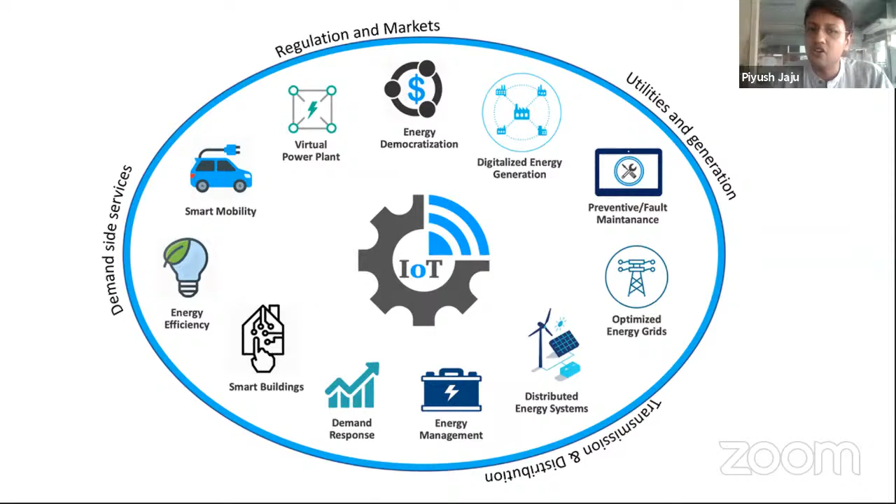Going forward, the very critical part would be how we are able to integrate artificial intelligence and machine learning also. That is going to be the real game changer going forward.

When we are able to have better algorithms for how we analyze all the data that is getting captured, and through that do better forecasting of all the data, in order to really reduce the risks that come about with renewable energy, because that is something we have to take as given.

The sun is not going to shine brightly every day. The stream of water will not be consistent every time, and so will be the wind. There will be large variations, especially when we are talking about climate change, which is going to absolutely create havoc.

We are fairly certain that climate change is going to play a huge role, which will alter wind patterns, conditions of the sun, of the rivers, of everything. If that is going to have such an adverse impact on renewable energy generation, then what can we do by developing better algorithms and better models wherein we can create automatic learning for better prediction based on our historical weather data?

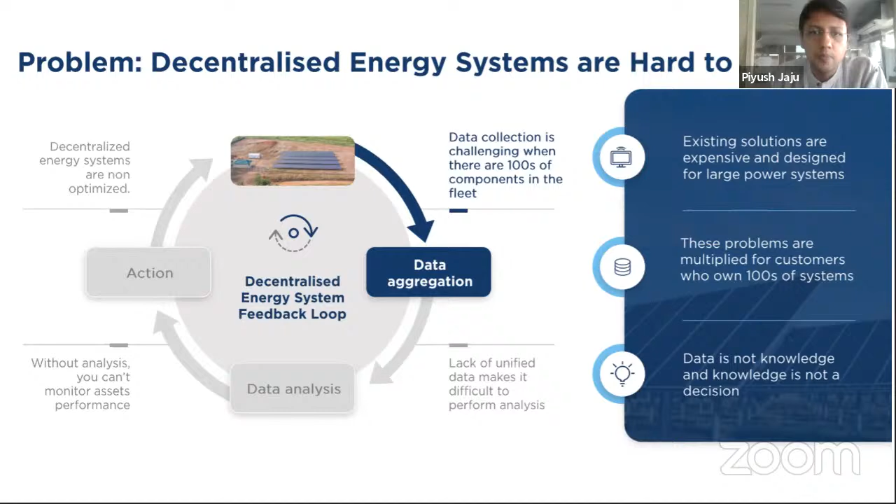We are able to really shorten the response time. We are able to clearly understand where the problem may lie. More importantly, we are able to build trust with the end user that these systems actually work. There may be some internal problems, or some external reasons why there has been failure of the system, but one can definitely address it when we are able to remotely monitor those sites and remotely diagnose what the problems are. So that's how, through IoT devices like remote monitoring and control, we are able to understand and really make a big difference.

So this is where I would like to discuss the remote monitoring and diagnostic part that we are now integrating with all our systems. That happens, be it with lighting or water pumping or various other things.

So here, especially what we've done, we've collaborated with a German-based company called Ferntech, wherein we are using what they call a universal monitoring controller. What does the universal monitoring controller do? It's a remote monitoring device which can be added on with any other controller. You have controllers for pumps, controllers for microgrid systems, or inverters. So through developing the APIs, you're able to connect with the controller of the system, and then monitor all the aspects of generation and usage.

And ultimately, all that gets stored in a cloud through which, in one central dashboard, we're able to monitor all the sites. So such kind of a remote monitoring and diagnostic device is the example I was given with. Here what we do is we just use any particular GSM based SIM which has data connection, which gets added on with this universal monitoring controller. Ultimately, with very little human intervention, we are able to monitor all the sites in a proper way.

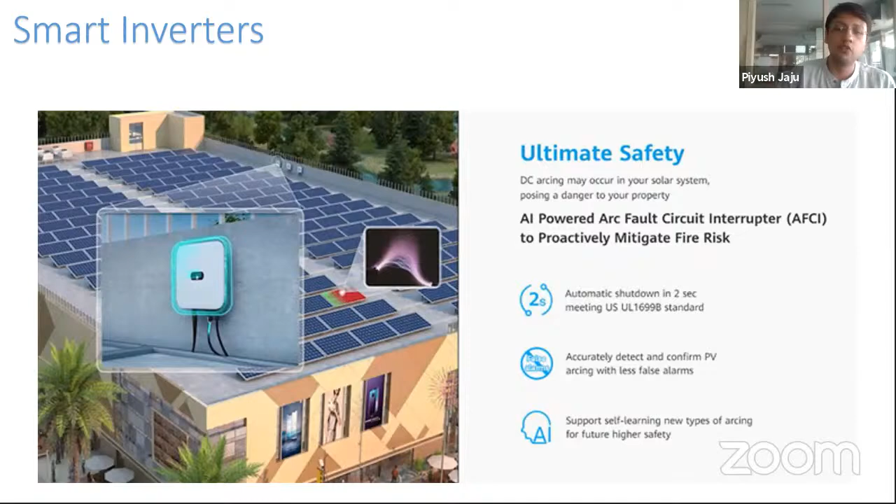Secondly, it's about again utilizing these remote monitoring systems in order to adequately understand, operate the system, and then adding an AI level going forward. By AI level, we are able to properly capture the irradiation level, the weather impact. We are able to model out if there is any shading happening, or any other obstacles which are there, at what time cleaning will be required if there is more dust accumulation. So automatically it throws out more alerts based on the reduction normally in the energy which is generated from the modules, which is most likely caused by the need for cleaning, which can then increase back the generation. So all those things we're able to utilize through better predictive models, through better algorithms.

If in future we have to definitely look to design these things more efficiently, it'll be very important to understand how automated cleaning can happen based on dust accumulation, and that kind of modeling is done so that generation can be increased manifold.

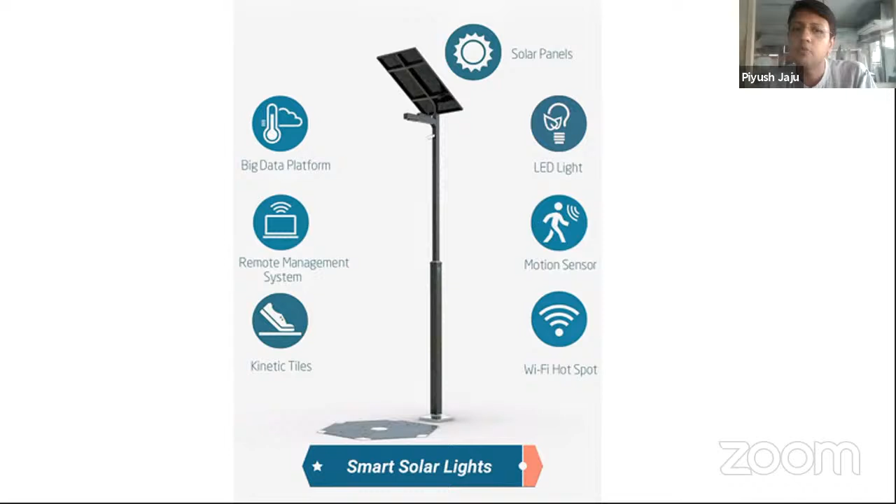One can even integrate cameras into the street light system. So you're able to, by sitting in my laptop, have a camera installed along with this solar street light, and I can understand what is going on over there. So those are incorporation of better smart ways in which we can really make these street lights much more effective.

Now, going to the point of village electrification through the solar microgrids which are there. Of course, when we initially used to install these microgrids, it was just something very simple. You have centralized either DC microgrids or AC microgrids, in which you are just powering the entire village which is there.

And we've seen there were so many challenges that used to happen because jugaad works so well even in villages. Somebody will figure out a way in which how you can tamper with the system, or you can connect different loads to it without any information, or there may be some other ways in which directly somebody is plugging the battery and powering some devices bypassing the controller. So there were so many different things that were happening.

But really, when you're able to make these microgrids smart, it can have such a big impact by using prepaid metering, prepaid meters, smart meters. So one would be able to understand that if there is any theft at a household level, the lights automatically go off, because with these prepaid meters installed, you will have to pay and punch a code in order to reactivate the system if you've not charged and paid for the household connection.

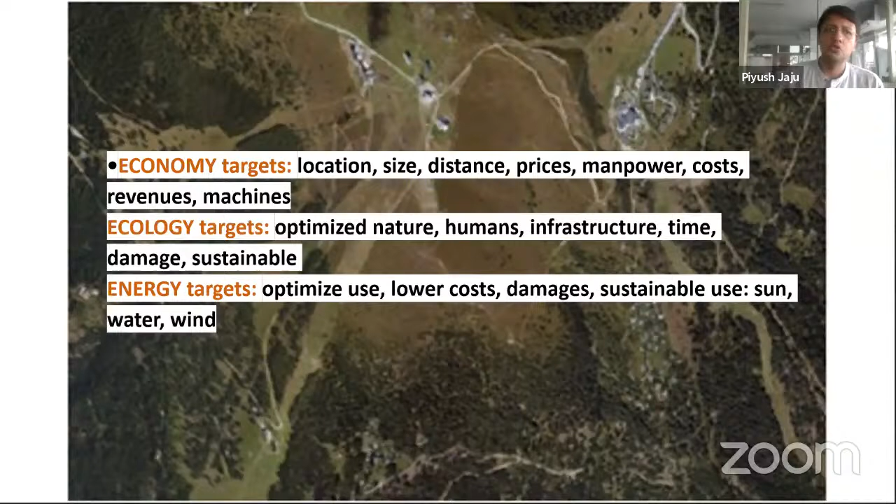And identify which are the key belts, maybe first, which are the key horticulture belts where there is deep penetration, which we should be addressing through these different agricultural smart solutions. That's one way in which we've been using the GIS maps. There's a company called PROGIS, based out of Austria, who's developed some wonderful GIS mapping tools through ICT, which is really able to assist with precision farming.

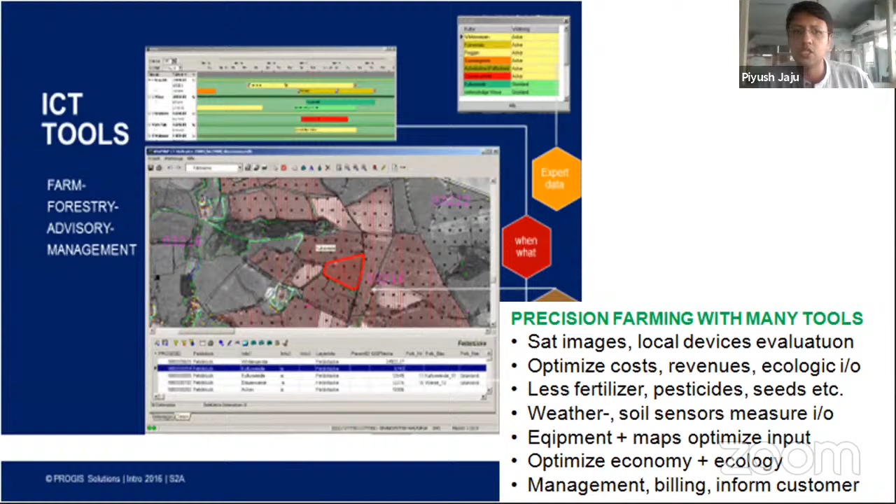So there, particularly, one of the key interventions is we are able to identify through satellite images, study the entire farm which is over there, how we are able to optimize at a macro level the areas which are being covered with different interventions, and then come up with the right kind of solutions based on the data that is getting captured through the software tool which is incorporating GIS mapping. These are some examples of what kind of images are getting captured, and specifically how you're able to address those particular issues.

Now, from a macro level, let's go down to a micro level. Let's look at how we can use drones to really understand and analyze at a farm level how it's happening. So the solution is simple: you're mounting a multispectral camera on a drone, and the drone is being used in order to do the entire assessment of the farm. So through the spectral images which are captured, one is able to monitor and understand.

From the soil, for the plants, the status of the plants, and even the solar cells, one can understand through the spectral images. There have been very significant ways, and it's really amazing, that just through these different images, the amount of information one is able to gather and understand - the level of soil nutrients, the moisture level in the soil, how healthy the plants being grown are, and is there any problems with the solar cells which are there.

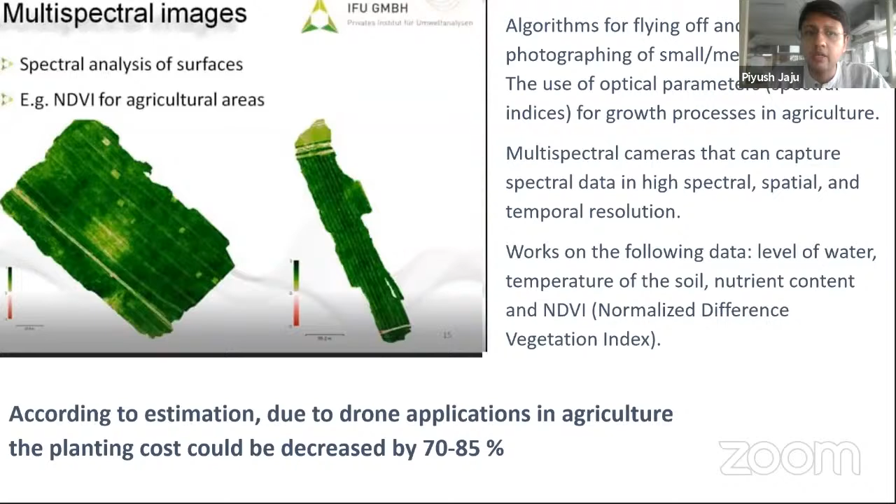It's practically so difficult to go around the entire acres and acres of area which are there, but especially drones can assist with getting the right kind of information. And ultimately this is where it really helps to better automate farm level mechanics and also do better precision farming, once we are able to analyze.

So a software has been built which can understand and read all these spectral images which are getting captured, and based on that we are being able to provide the right kind of inferences and the different interventions required, and ultimately that's what will lead to greater agricultural productivity. It's very surprising, the productivity which is there, and the different ways in which we are able to really enhance it through these smart technologies.

So these are some of the cameras which are installed on top of the drone, through which we are able to capture these high resolution and spectral images, which are then ultimately analyzed to improve better farm management and enhance productivity, and to pinpoint the right kind of interventions required for better crop management - be it pest management, or any loss of nutrients in the soil, or any problems which may have a big adverse impact on ultimate productivity. Those are things that can ultimately be addressed through these interventions.

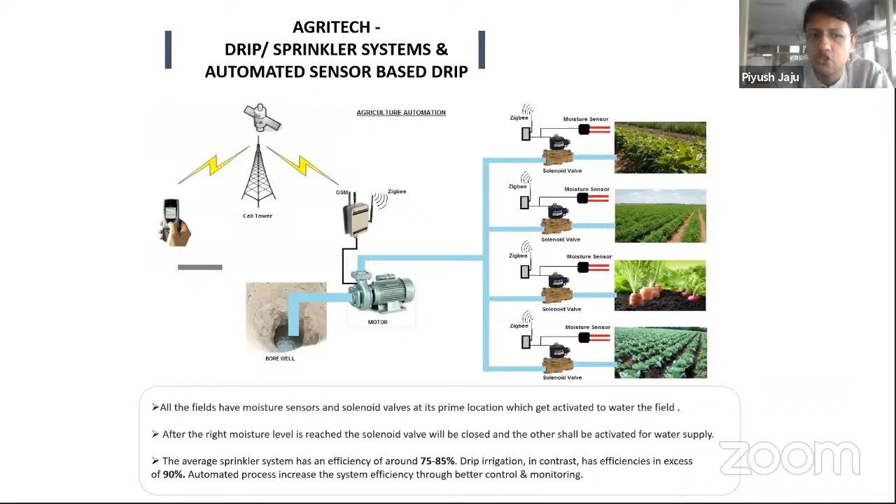As we know, drip and sprinkler based systems are able to reduce water requirement by 50 to 80%. As compared to a regular drip system, the automated sensor-based drip system can bring about a further 25 to 30% efficiency. So overall, compared to regular flood irrigation, we are able to achieve more than 90% efficiency in water usage when we combine it with moisture level sensors and automate it without any human intervention on when to switch the drip on or off. We are not doing any kind of over irrigation, and everything can run much more seamlessly. This can really have an impact to transform the entire irrigation space, which we are very keen to develop.

Overall, the understanding is that through the app we are able to better monitor the irrigation level and how much fertilizer is being used. So better water management and better fertilizer management is what we are able to achieve through this app. We integrate this app with the regular solar water pumping system, or even the automated sensor-based drip system. Ultimately, the app provides important feedback and data, with the help of various sensors deployed, to optimize both the fertilizer requirement and the water requirement, which would significantly enhance the productivity of agriculture, but also save on the input costs required.

These are solutions that are not just simple R&D for the sake of being smart - ultimately all these solutions need better unit economics and cost economics if we are to scale. Unless there is a clear financial benefit, there's no point developing these technologies. That's why even with a small investment in the app and these automations, what really helps is the amount of savings in input costs - if one is able to save 50% more on fertilizer costs, on diesel costs, on electricity costs by going solar, and by reducing and optimizing the design.

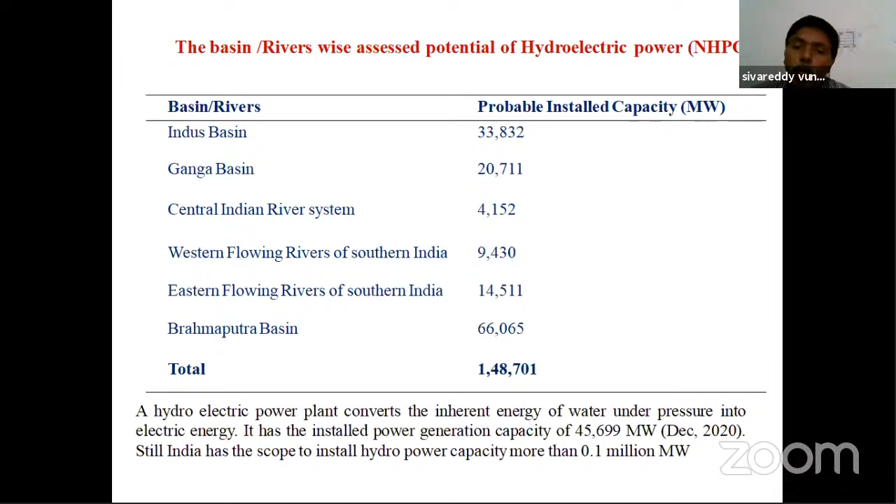So hydro construction is not that easy. If anything goes wrong, villages will escape from our map, the Indian map. That much of danger is there. Even though we are facing that much danger, the maximum capacity we can achieve is only 1 lakh megawatt.

Next, coming to wind energy. Okay, we will move to wind energy. What is the maximum capacity? It is 48,561. We already installed more than 30,000. There is not much scope left.

One more source is bioenergy. That is also not sufficient. At present, India has 1,000 megawatt. So our needs are in lakhs, but the available sources are only in thousands.

That's why, even though solar radiation has more intermittent nature - no guarantee how much energy is coming, it changes hourly - we are still dependent on solar, because the only energy available in the world sufficient for fulfilling our needs is solar energy. That's why we concentrate on solar energy.

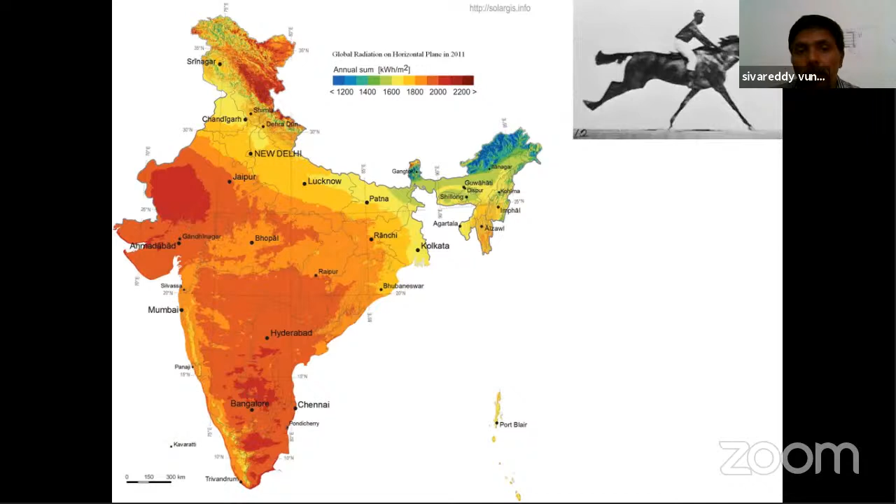This is the sun's nuclear reaction. The sun's temperature is around 5,771 Kelvin. That much of radiation and temperature energy, once it reaches Earth, temperatures reach up to a maximum of 50-55, and radiation of 1353 watt per meter square of solar radiation is coming.

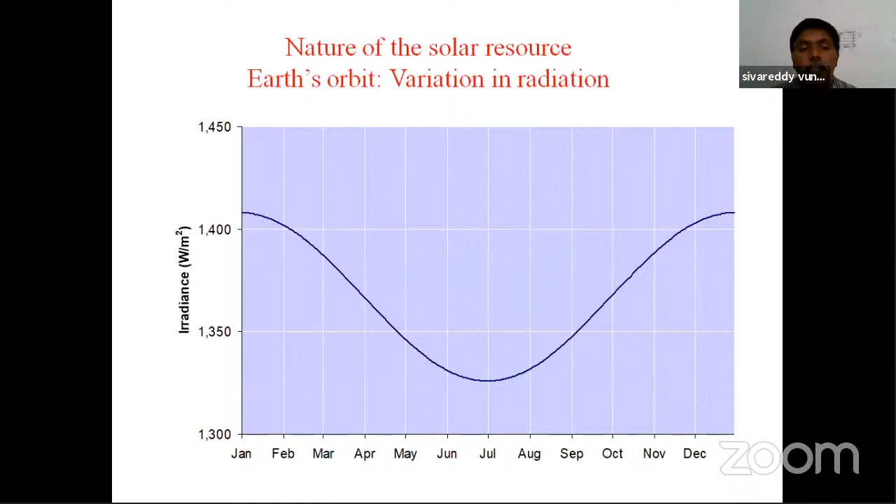Maximum watt per meter square of solar radiation can reach the Earth. This is the Earth's orbit radiation variation, and based on Earth's self-rotation and axis rotation, and because of the sun's rotation, so many angles come into the picture: latitude angle, longitude angle, hour angle, zenith angle.

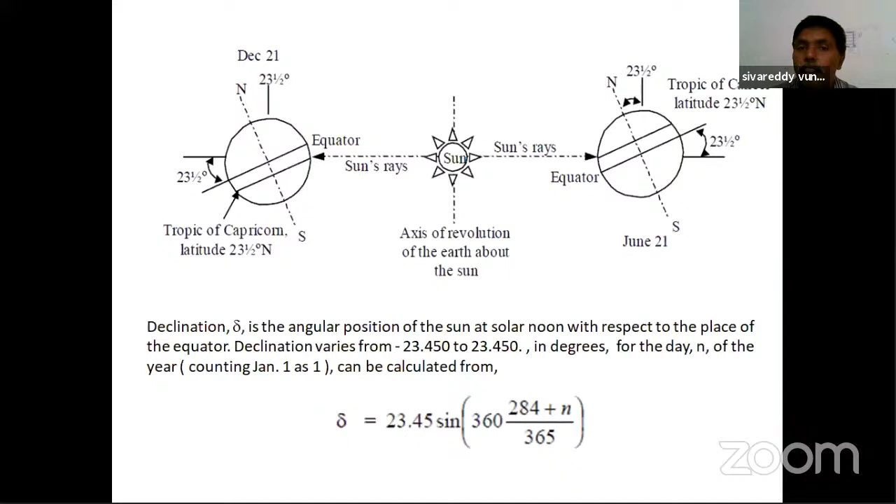So based on the declination angle, different angles are there. Because of the angle of inclination, some of the energy is lost. I think from the 1980s to 2010, more than 50 theses were produced based on just measurement of solar radiation - nothing else. Measurement or estimation of solar radiation with respect to latitude and longitude. That estimated solar radiation may be beam radiation, not global radiation, or sometimes it is global radiation, sometimes it is beam radiation.

More than 50 theses I know. IIT Roorkee or IIT Delhi or IIT Bombay majorly produced thesis just on measurement of solar radiation or prediction of solar radiation.

One of the models I am showing, because in our IIT Delhi, my senior did this validation. Finally, the measured value and predicted value almost came to a nearer value, not exact. So this model is somewhat useful for a particular location only, Jaipur station, not all stations. This model is not valid for all stations.

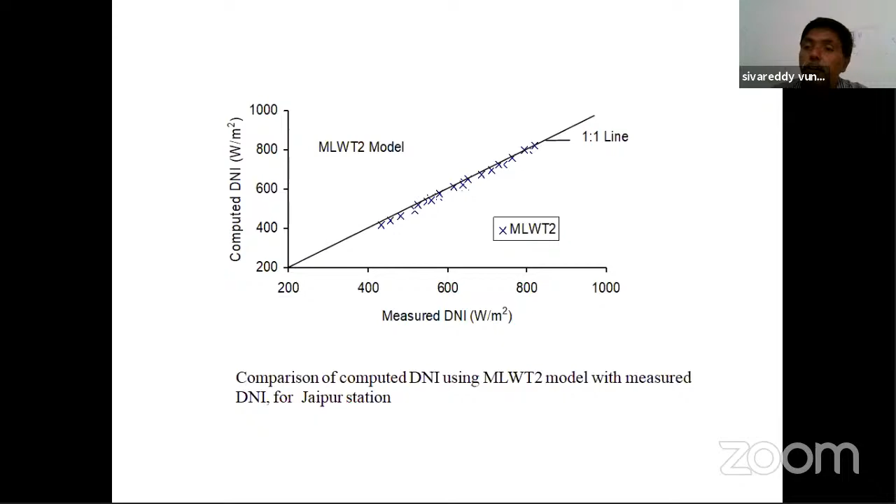Then for prediction itself, we are doing this much research, meaning when we will develop the technology, that is the question mark. So developing technology, we are stopping at measurement of solar radiation. That's why establishment of a lab is very much important.

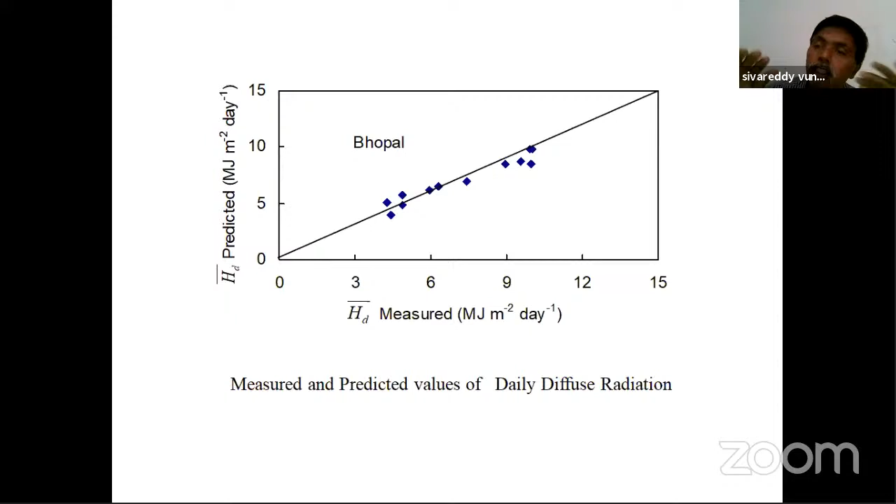If your proper solar radiation measurement lab is available with you, then you can do some harvesting technologies, solar radiation harvesting technologies, and we can do evaluation, performance evaluation, and cost economics and feasibility study of the systems. If you don't have any proper scientific measurement system with us, then we are stopping up to just measurement of solar radiation only.

Just for the importance, I am showing different measurement instruments that are there. A pyranometer is there. This is the pyrheliometer for measurement of beam radiation, but this sensor always has to be opposite to the sun. Only then will it generate the EMF. Otherwise, it will not generate the EMF.

The pyranometer has two bulbs, or evacuated bulbs, in it. Basic principle is just thermocouple junctions, two dissimilar metal junctions exposed to different temperatures. Automatically, it will generate the EMF.

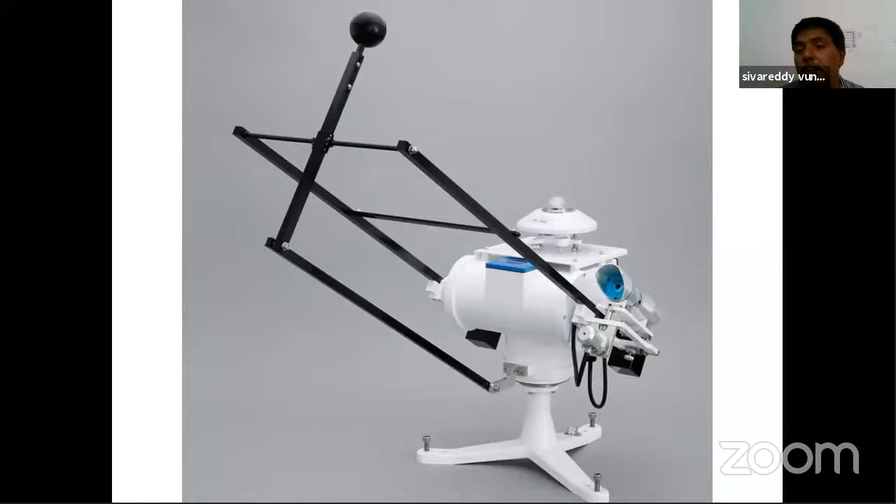This is the tracking unit. Because I want to maintain it opposite to the sun, and every time one person cannot sit and search where the sun is, a tracking system is required. This is the facility available in the institute, and logging facility. I will show that one.

Next, temperature measurement, we are using different measurement units.

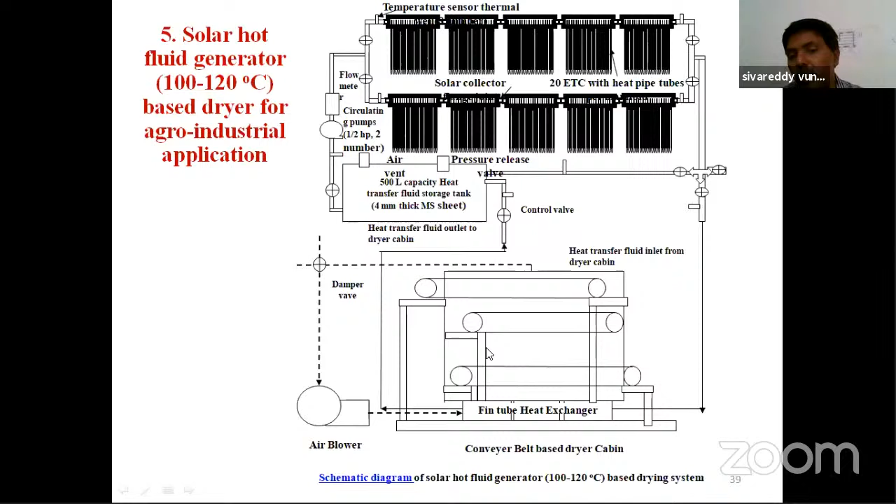Second, solar dryer facility, I already mentioned, industrial solar dryer with us. ETC with heat pipe collectors, collecting the solar radiation and storing that energy in a storage tank. From that, we are supplying the hot fluid and air, circulating inside the dryer cabin. Here we are heating, and removal of the moisture is taking place in a conveyor belt drying system.

These are the units: solar collector and thermal energy storage unit, and dryer and damper unit, and a full-fledged conveyor belt drying unit. Now, with this small introduction, I think you understand the purpose: measurement of solar radiation, and one established industrial dryer is available in our lab.

Any participants from the Rayalaseema or Andhra region can visit anytime. There is no issue, easily you can access it, and also it is away from the class work. So anytime it is welcome for all participants.

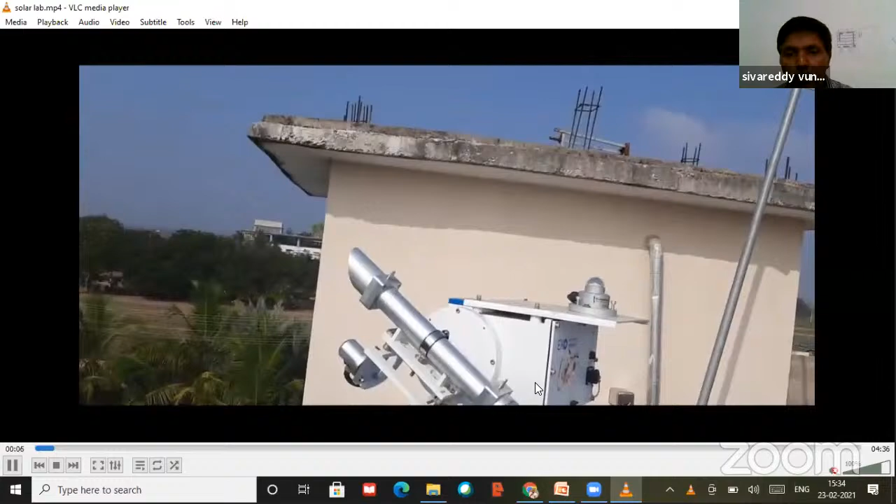Next, I will show the instruments. This is the instrument. Now it is not opposite to the sun. Why? Because I have not given power supply to the tracker. This is the pyrheliometer for measurement of beam radiation.

Pyranometer horizontal, upon the horizontal plane, measures how much solar radiation is coming. It is opposite to the sun, measuring how much global radiation we are getting: global radiation and beam radiation. Then we can calculate the diffuse radiation.

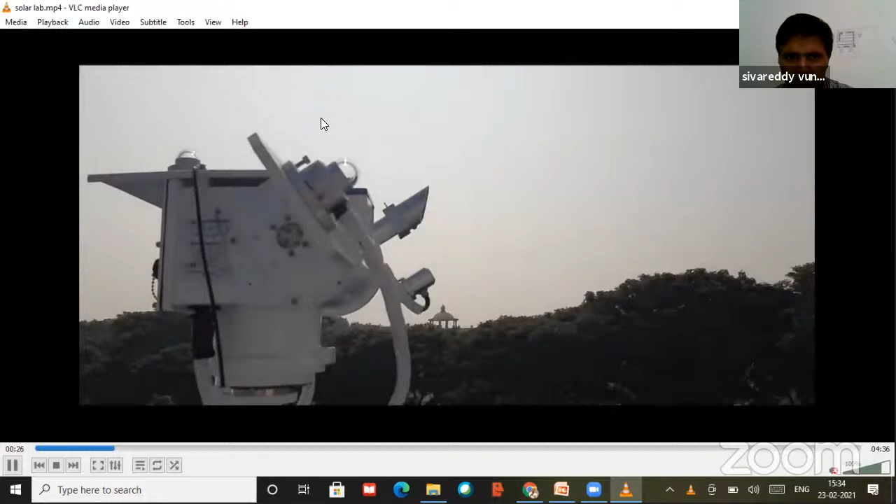Sun is on that side, our system is on this side. Why? Because I am not giving power to the tracker. Once I start supplying electrical energy to the tracker, then automatically it will track the sun first.

You can see this is our institute building, so it is somewhat away from the main buildings, because for R&D we established a separate solar R&D center.

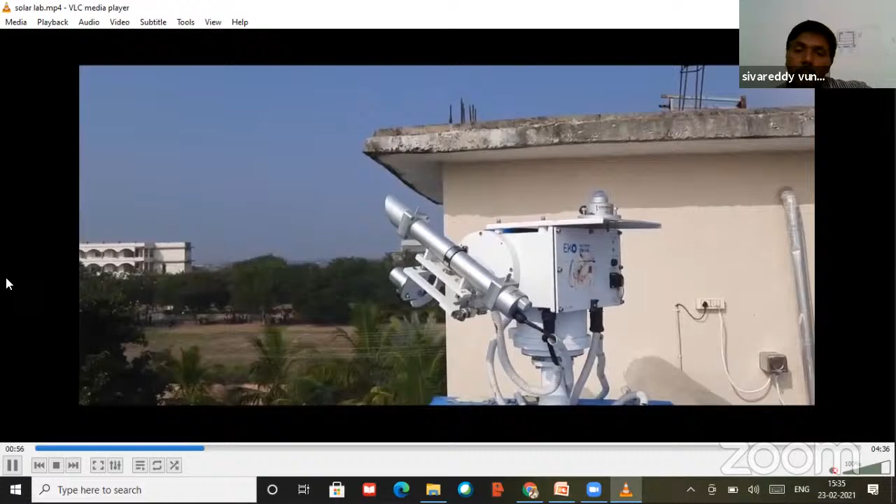See, now also we are not given the power supply. Yes, now we have given power supply. Then it is first tracking the sun, searching for where the sun is.

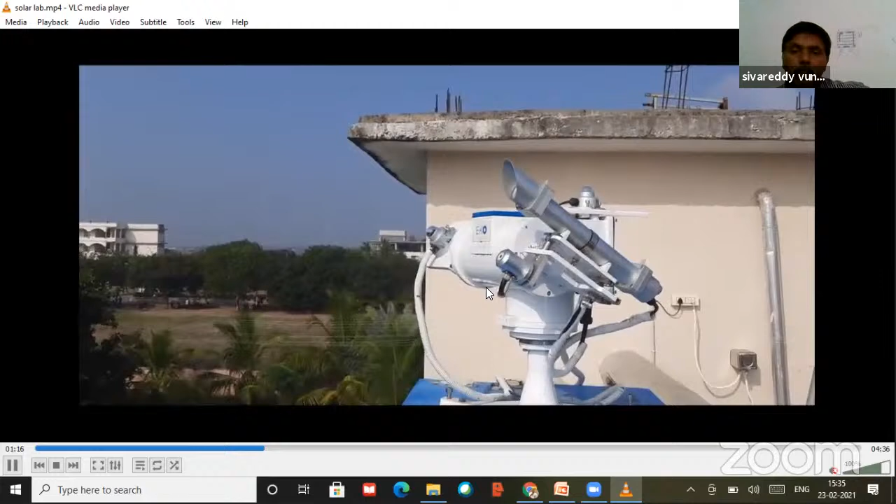This is the sensing unit. The sensors give equal amounts of EMF, then only it will stop. The tracker will stop. Yes, dual axis tracking, multi-axis tracking, not just dual axis. It is searching for the sun, where it is available.

Yes, let's see. Actually, we purchased a dual arm system tracker. It measures global radiation opposite the sun, and measurement of beam radiation.

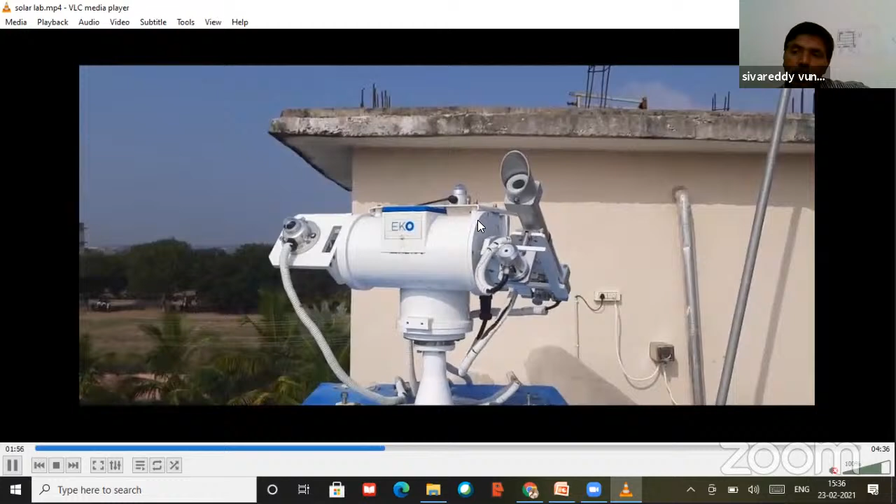Global radiation, I already mentioned, maximum we will get up to 1353 watts per meter square. Actually, there is no pollution, clear sky is available. Maximum beam radiation also we will get 1353 watts per meter square. Generally, due to cloudy conditions or pollution, the value may reduce. I will show the readings also.

So now it is setting opposite to the sun, almost 99.98% accuracy there, tracker accuracy.

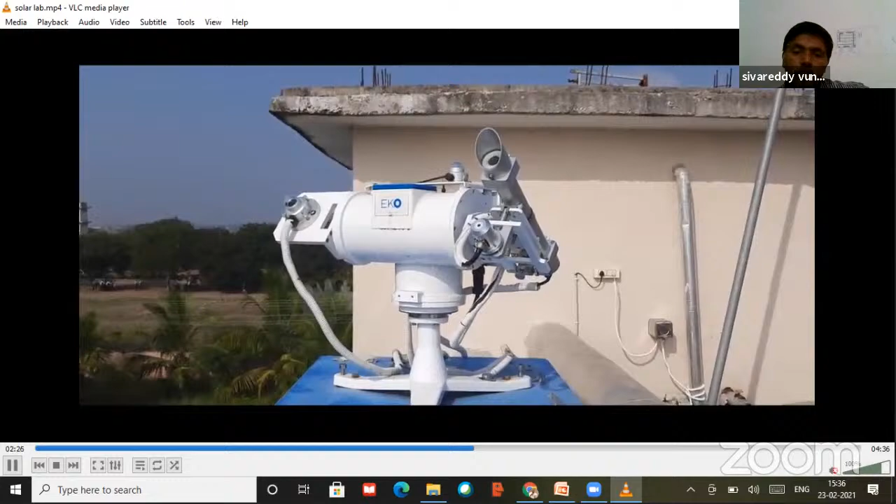Now you see the dataTaker, the data logging unit I already mentioned. It is capable of logging on a per second basis, so high level intermittent nature also we can capture.

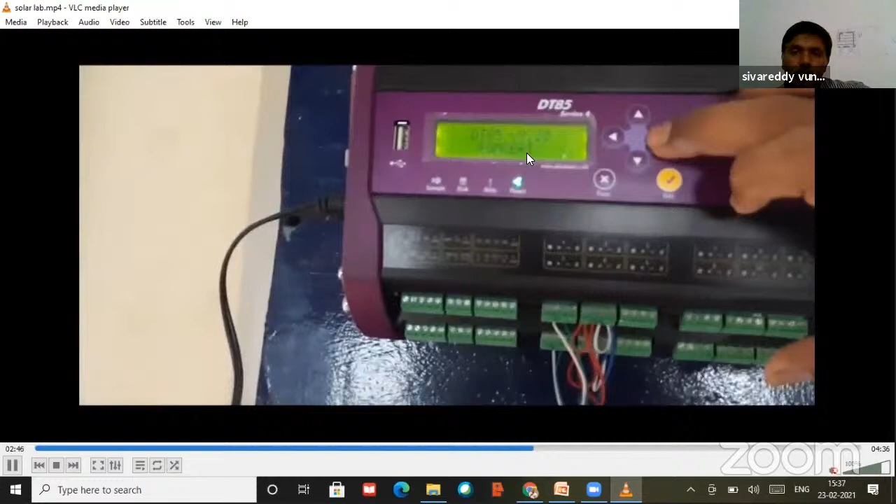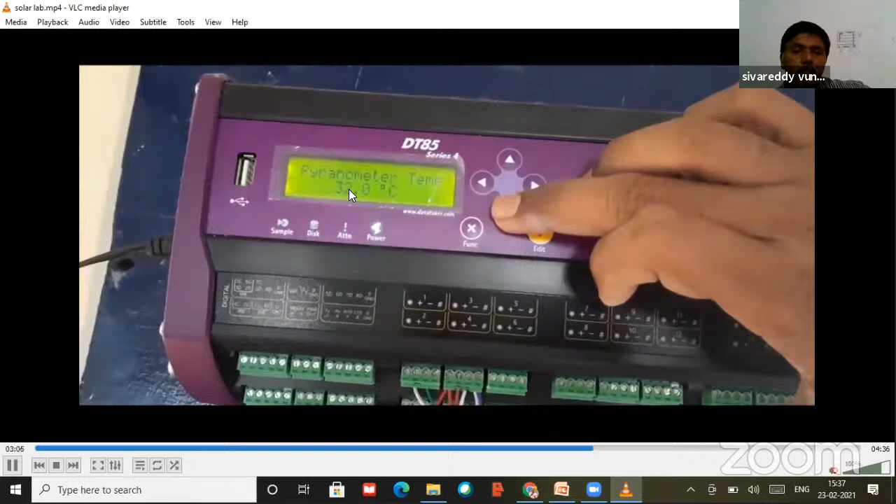Just the location we given, RGM city. There you see, first it is measuring the EMF, voltage content, and first one the pyranometer showing 1053. The second pyranometer is showing only 655. And bulb temperature also it is giving. 1000 is the beam radiation - it's not beam radiation, actually global radiation.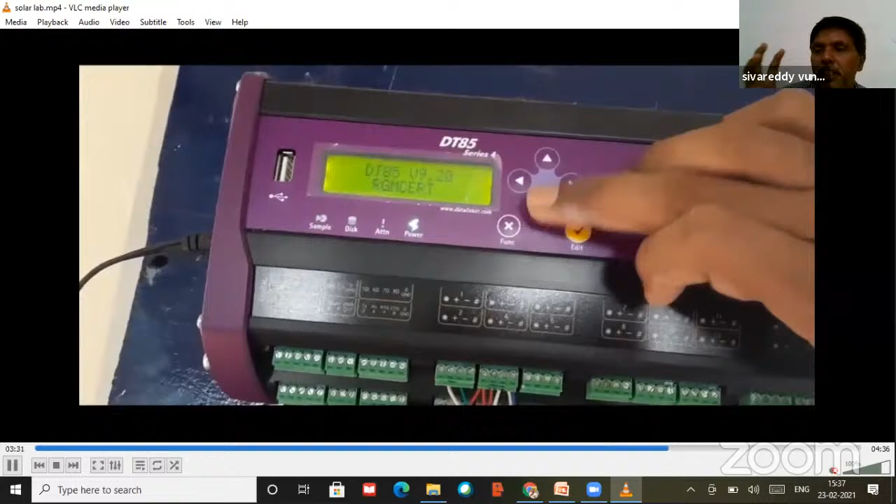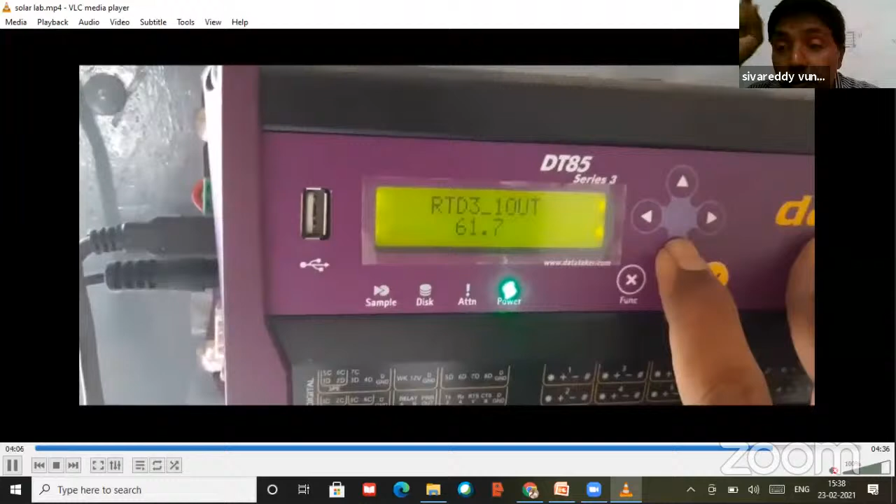I am not changing the place - that much of angle of inclination is there. So my concentration is not just measurement of solar radiation, that's why I procured quality measuring equipment. If anyone developed any system, we are capable of doing the performance evaluation and economic evaluation of the system.

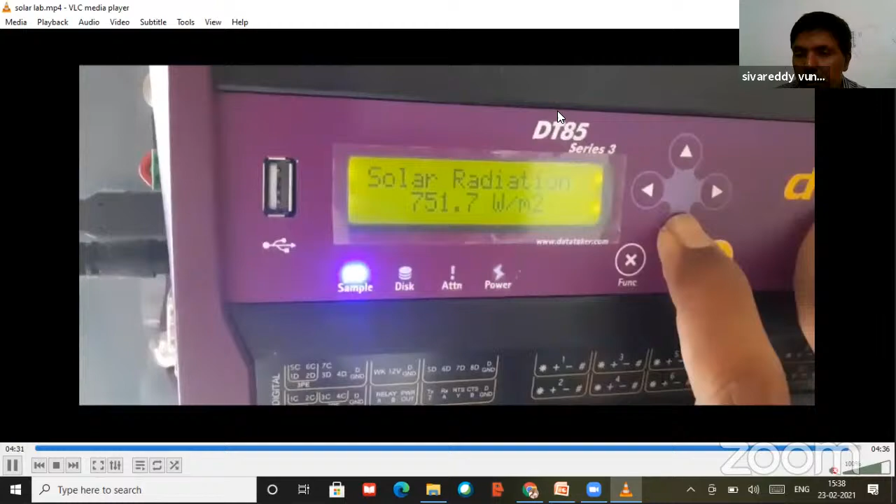This is part of the measurement of radiation. And for the second video, I will show the solar dryer unit.

This is the top view of the system. Just checking the unit.

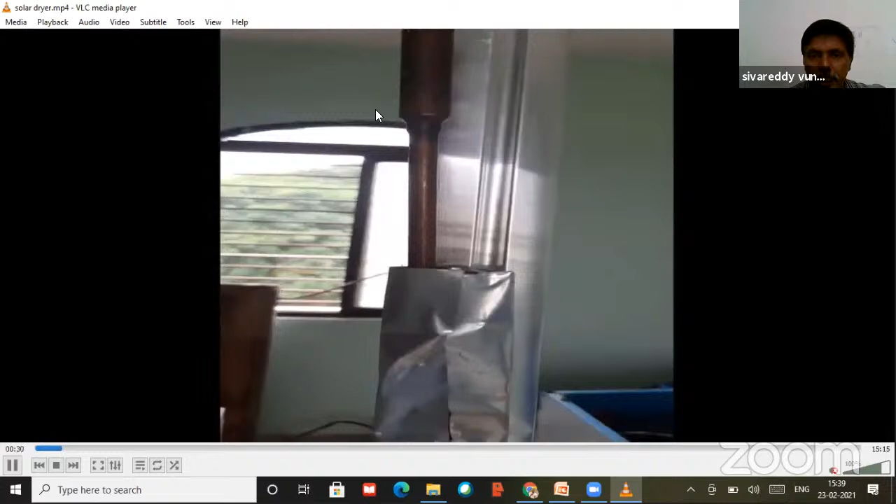Yes, ETC with heat pipe collector I mentioned. This is the heat pipe - downside is the evaporator part, top side is the condenser part. Using aluminum foil support, we are placing it in center. This evaporator part is placed in the ETC tube and the condenser part is placed in a manifold. You can see ETC tubes also, excess tubes we procured. Inside the tubes, I am immersing the heat pipe using the aluminum foil support for centering purpose.

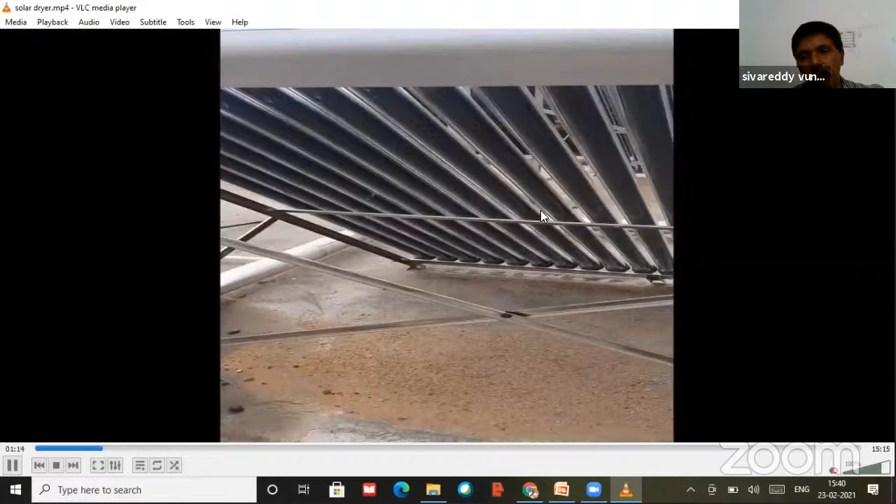This is the collector unit. Total structure is fabricated by SS only. Because of SS, lightweight is coming, that's why we did grouting with the ground.

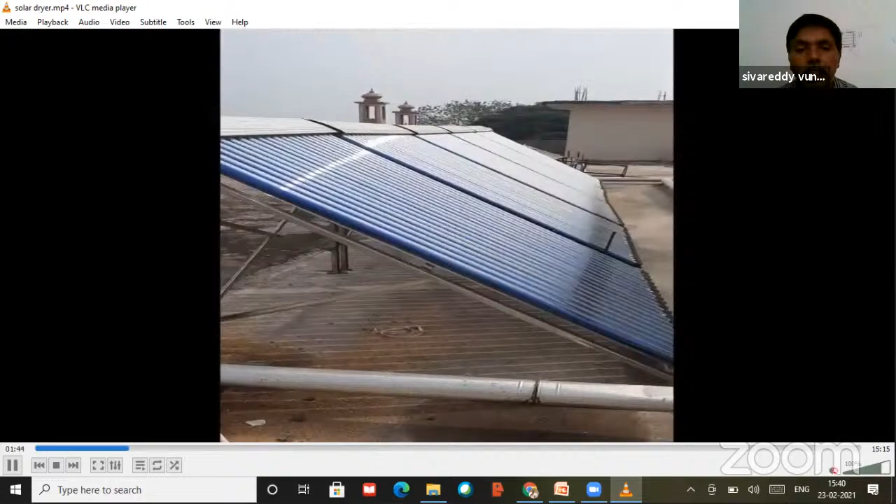This is a single manifold containing 20 ETC tubes. 20 ETC tubes contain 20 ETC heat pipe structures. Heat pipe is immersed in the manifold. 5 collectors in series to achieve the desired temperatures. The tube length is 1.8 meter, diameter is 58 mm. Let's see, 5 in series, again one more 5 in series - total 10 collectors we connected.

You can see, this is one more system - solar wastewater evaporating system. This is the second row of the collectors.

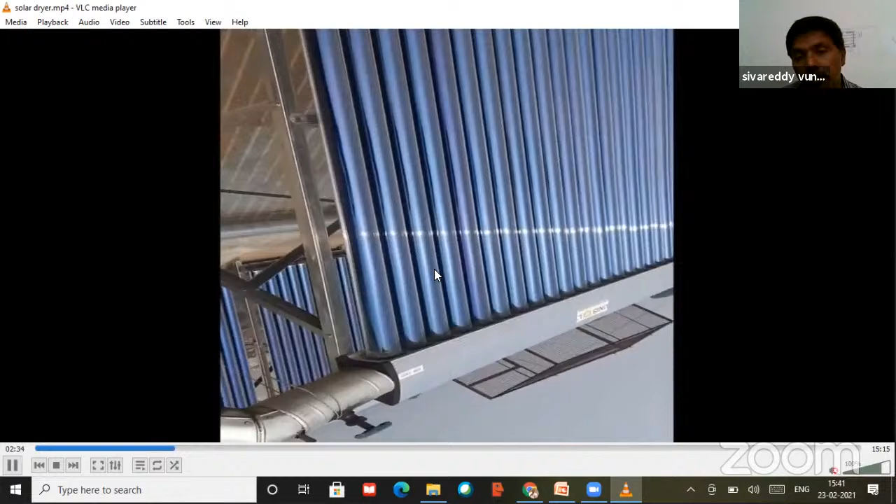You see some shading effect is coming. Unisol, it's a Gujarat-based company, they supplied it. Because earlier I worked in Gujarat, so I have very good relations with the manufacturers - the entire system was procured from Gujarat suppliers only.

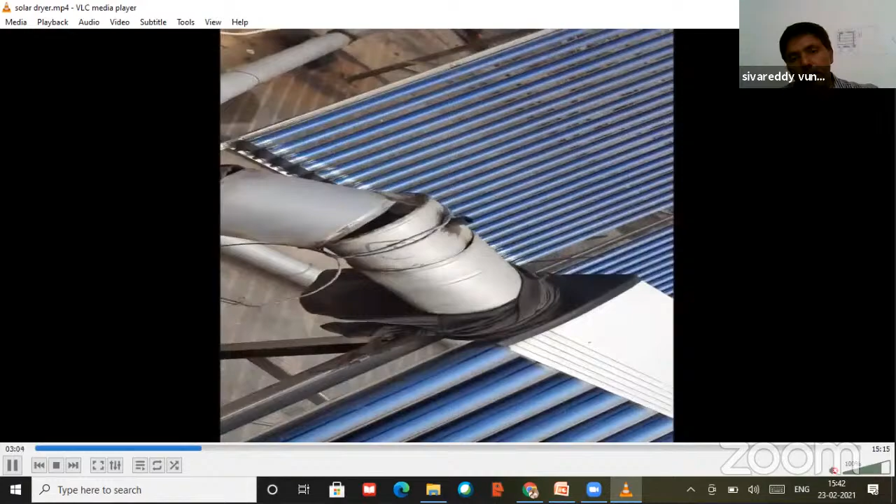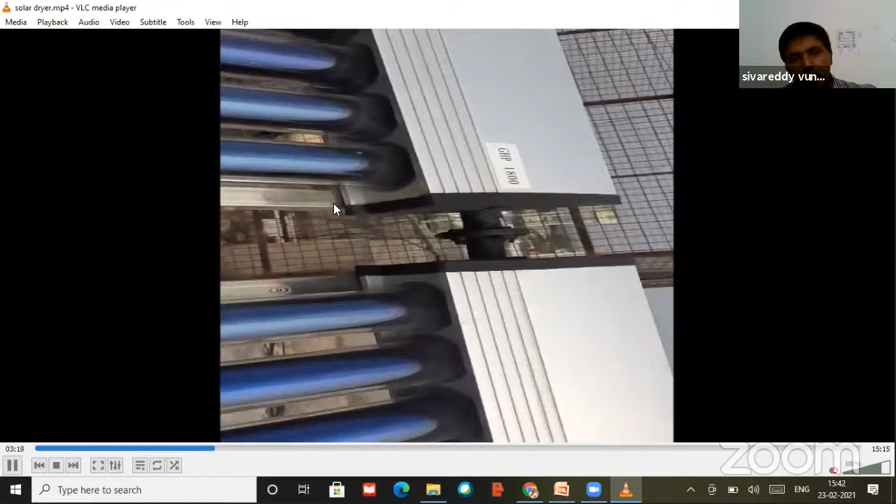You can see the heat pipe, how we immersed it in the manifold. So if any collector fails or breaks, our system will not stop - our system will run because fluid is not entering into the glass tubes, fluid is circulating only in the manifolds.

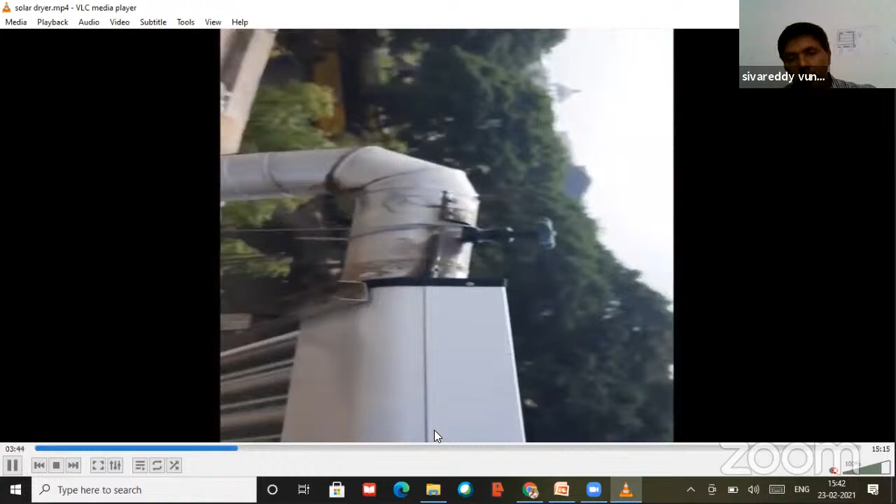But all valves are manual valve control only - we placed them for R&D purposes. Once we reach the desired operating parameters, we can do the automation, but this is for R&D, that's why every connection is manual by valves only.

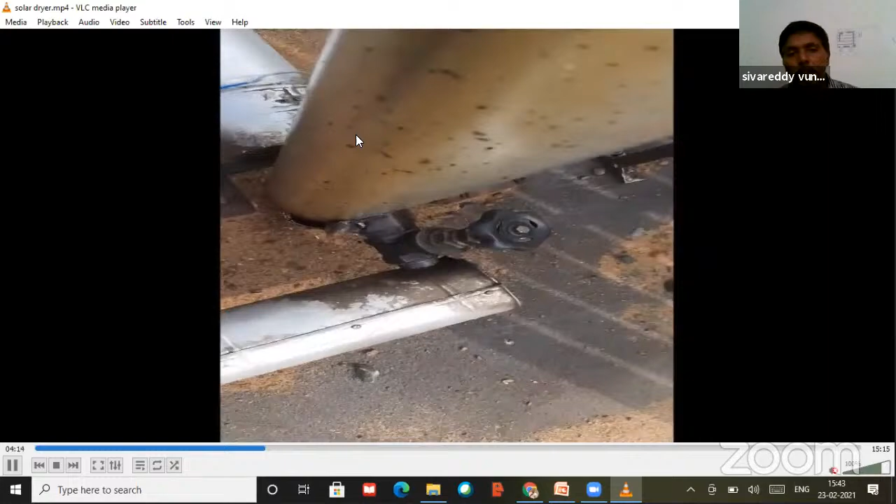Different loops I placed - one loop goes directly from collector to the dryer chamber, another loop from collector to the storage tank, another loop from storage tank to the dryer chamber. Three loops are there, and according to solar radiation availability and demand conditions, the loops will change.

This is the final connection going to the drying unit. The drying unit is placed on the ground floor and the total collector unit on the top floor. Storage facility also I placed on the first floor, top floor only. Only the dryer unit and heat exchanger unit are available on the ground floor - remaining everything is available on the top floor.

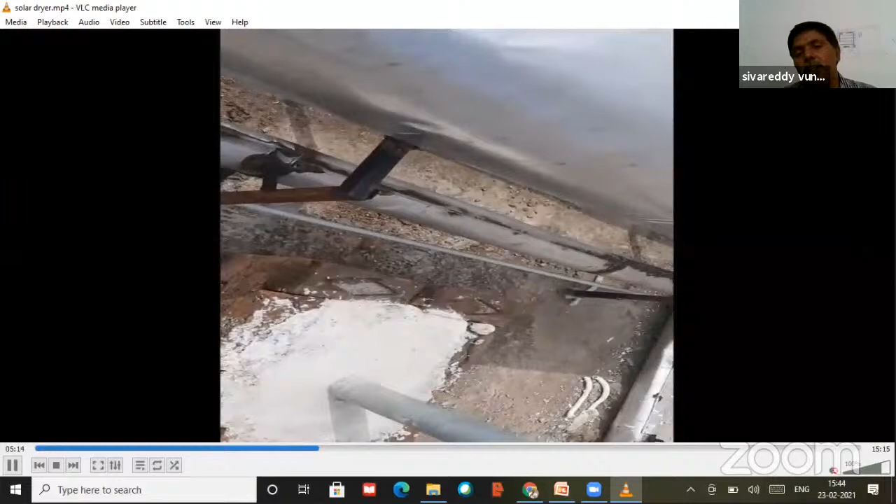You can see the real working of the system. Some oil is leaking - this is common practice for industry. If any person visits an industry, you can compare: if it's really working, some leakages come into the picture. If it is not working, it will remain clean and green.

This is a flow measuring unit - how much flow rate is taking place.

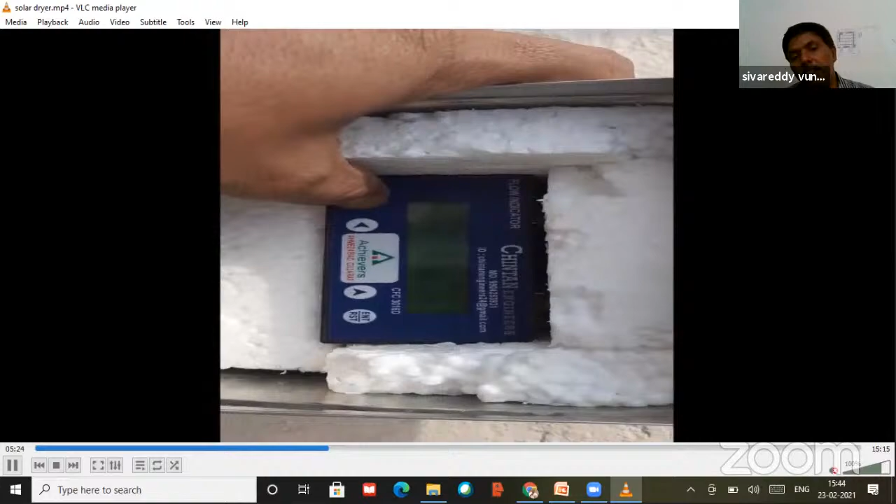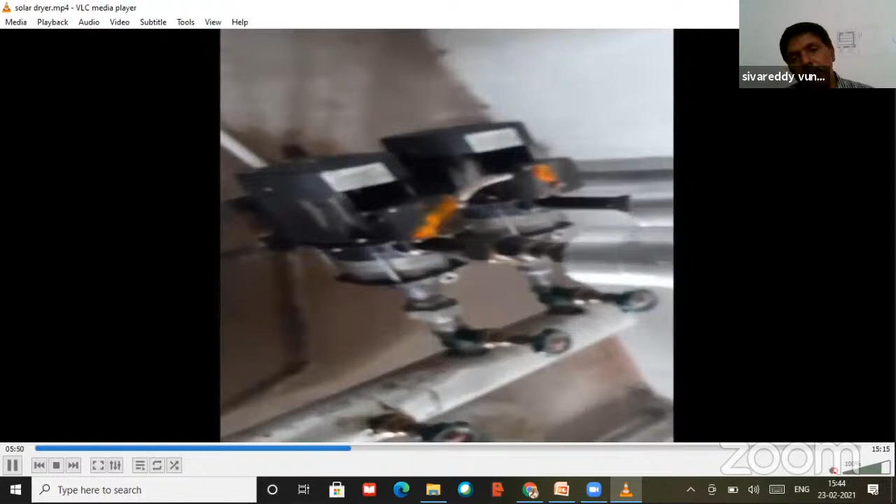Yes, you can see, this is the circulating pumps - two pumps, standby also we placed. If one pump fails, the second pump will come into the picture. From the tank, sucking from the tank and circulating through the collector, or circulating collector and dryer, or circulating directly to the dryer unit. This is the storage tank, 500 liters capacity.

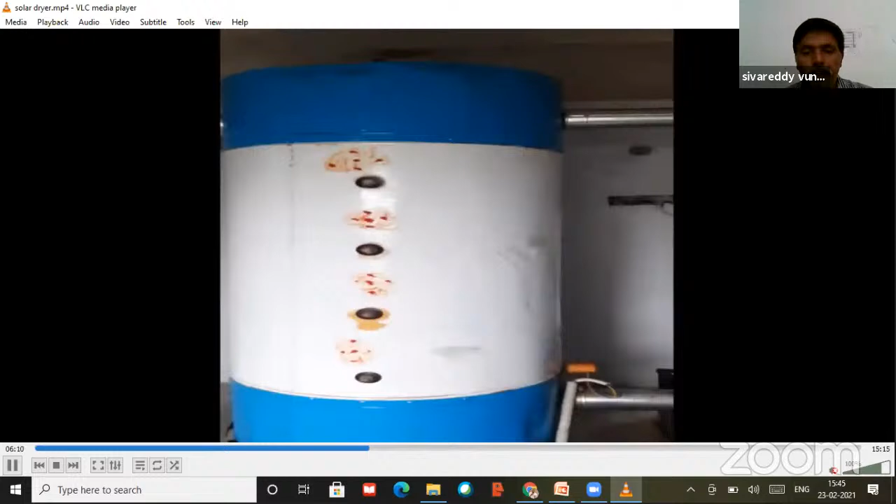And electrical heater connection is there - if solar radiation is not available, we can give artificial heating of the fluid. This is the blower unit.

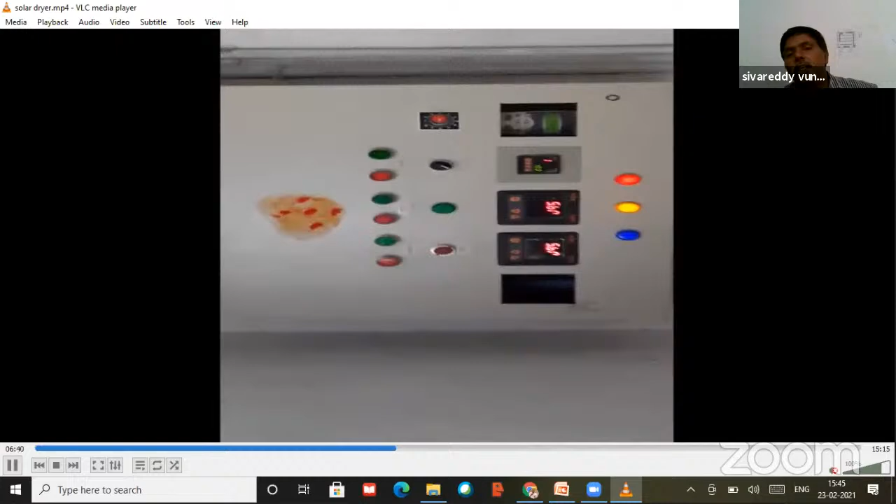Because after installing the system, construction of the shed takes place. This is the controlling unit, flow rate control and blower speed - a variable speed drive unit we connected. Different velocities of air we can achieve, different velocity of the fluid speed we can achieve. Now the blower is running.

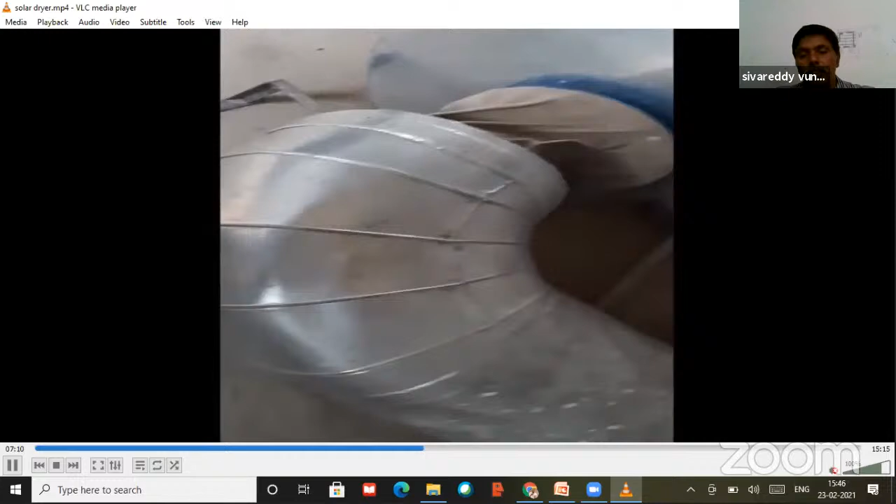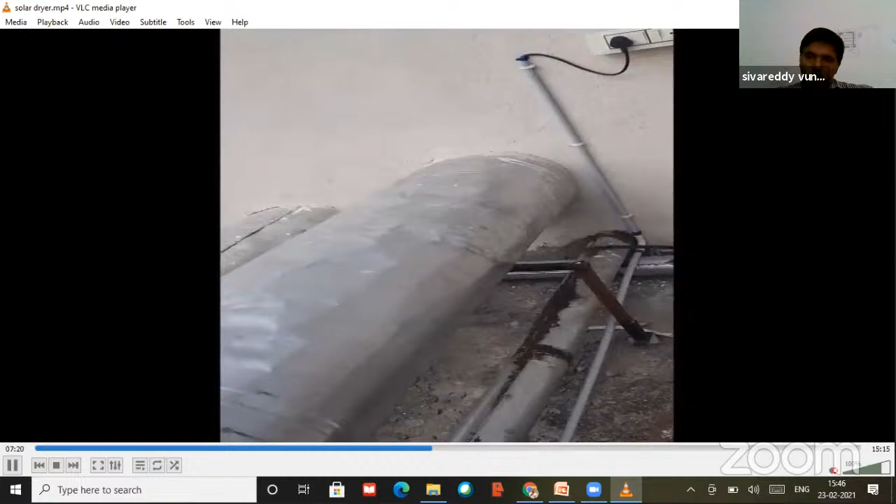So from that blower unit, duct is moving. You can see the duct is coming from the blower unit, and it is connected to the first floor dryer cabin.

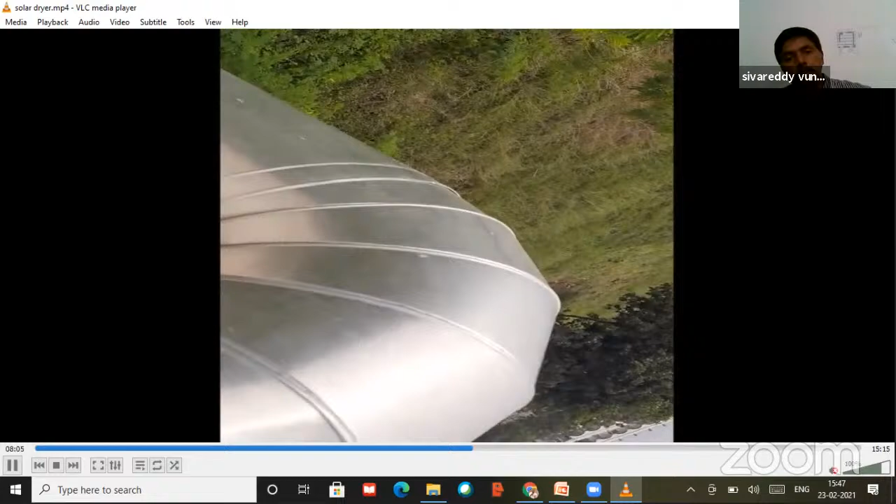And from the first floor dryer cabin, exit is coming from first floor dryer cabin to the top. Here, damper unit, we placed the damper unit.

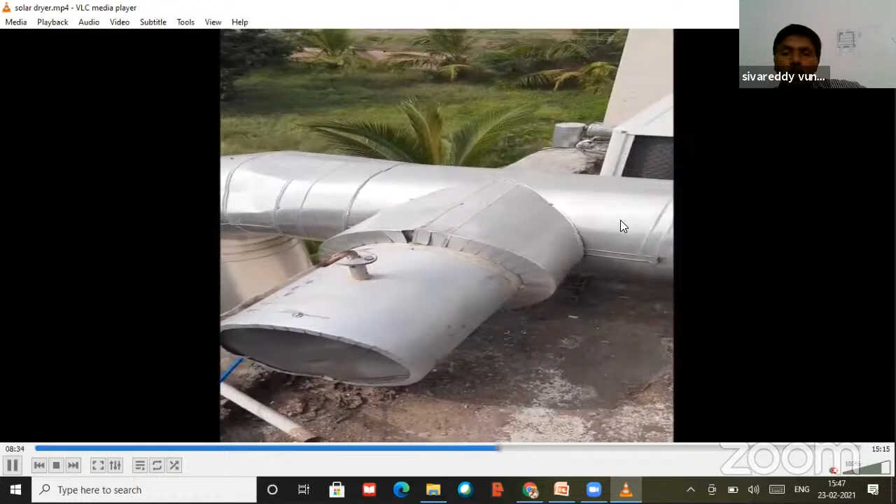If we want to recycle the air, we will close this exit damper and open the intermediate damper, and we will close the inlet damper also. Then same air we can recirculate. If we want fresh air required, intermediate damper we will close, and exit and inlet dampers we are opening.

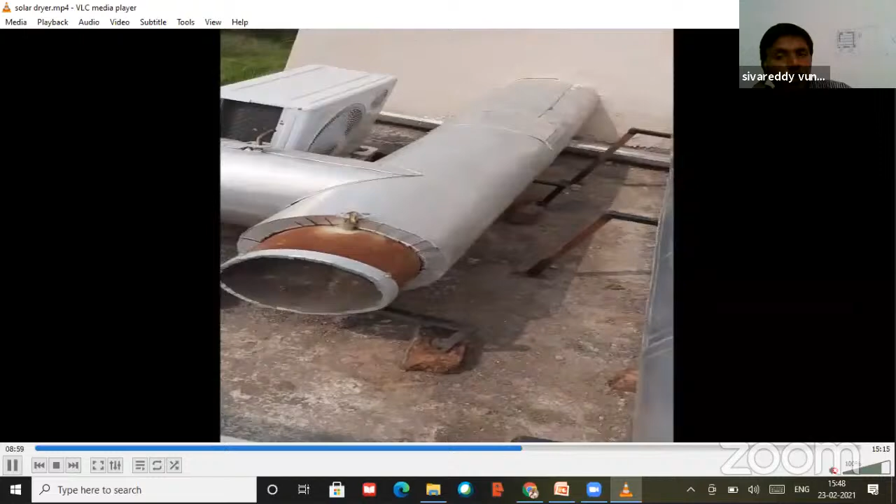So different, as I already mentioned, for energy saving purpose, bringing of the bound moisture to the surface. We don't want fresh air always; same air we can circulate based on the relative humidity. So intermittently we are measuring relative humidity and operating the dampers. This damper operation is manual only, because product to product is changing, and seed to seed also changing. Chili I selected, different types of chilies are available, so seed to seed the removal of bound moisture to the surface is changing.

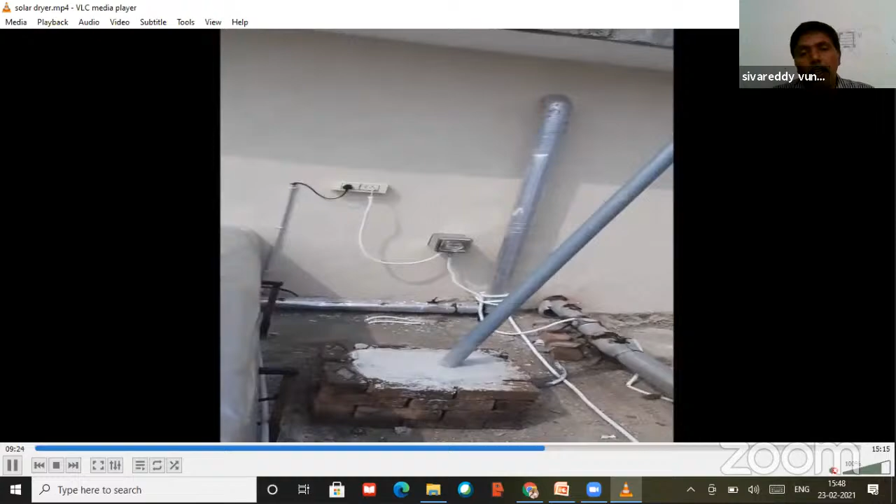That's why we kept manual operation only. Next, coming to the first floor, this is the dryer unit room.

Fluid is coming from the hot storage tank and directly goes to the dryer cabin heat exchanger. From the blower unit, duct is also connected to the heat exchanger. Fin tube heat exchanger we used, like a radiator.

You can see this is the system, this is the fin tube heat exchanger. So air is flowing through the fin tube heat exchanger and it is entering into the dryer cabin. This is a conveyor belt dryer.

This dryer unit exit connection is connected to the total manifold, and the same ducting unit is coming to the top side.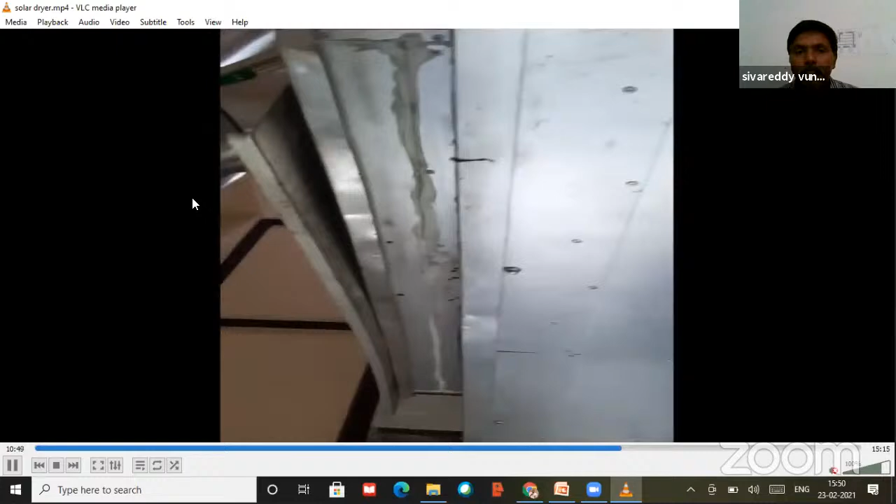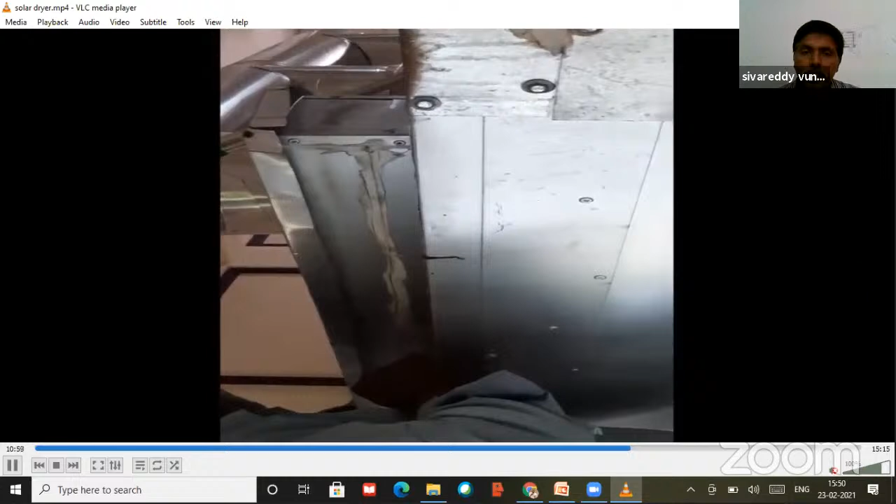The feeding of the material is pouring from the top side.

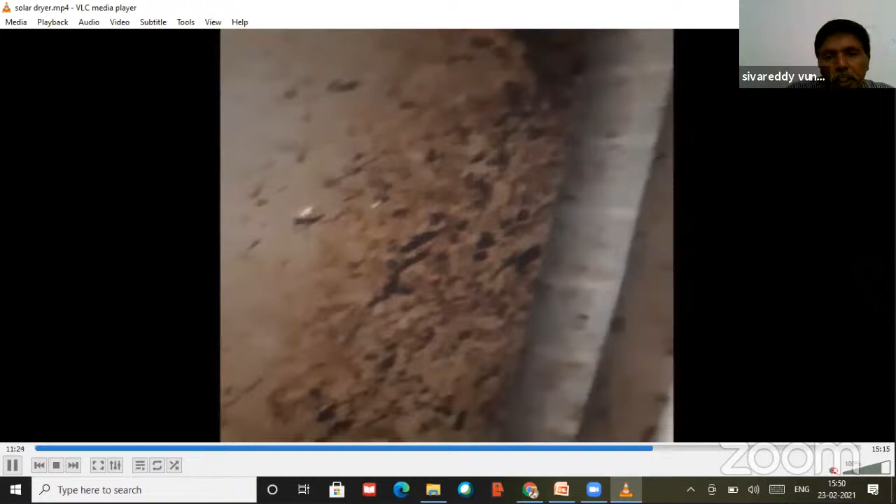You can see white cotton cloth we used upon the conveyor belt, because the material size we don't know; different materials we are using. Mesh cloth, you can see. So air circulation will take place, but the mass will be available at the surface of the conveyor only.

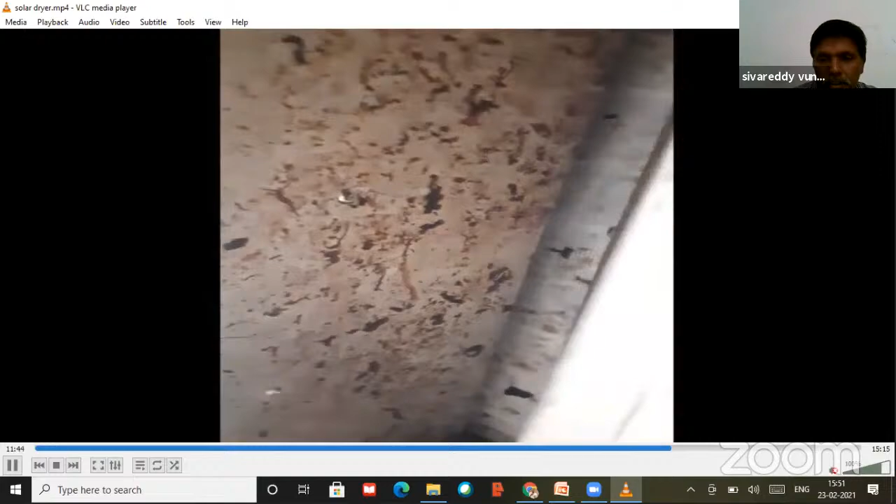Inlet and exit of the heat transfer fluid. So in the lab, according to our convenience, we gave the P&I connections. There is no rule at all; it's according to availability of the space condition.

Now our person started the conveyor belt. The movement of the conveyor belt you can visualize. This is the outlet, inlet is top side, outlet is downside.

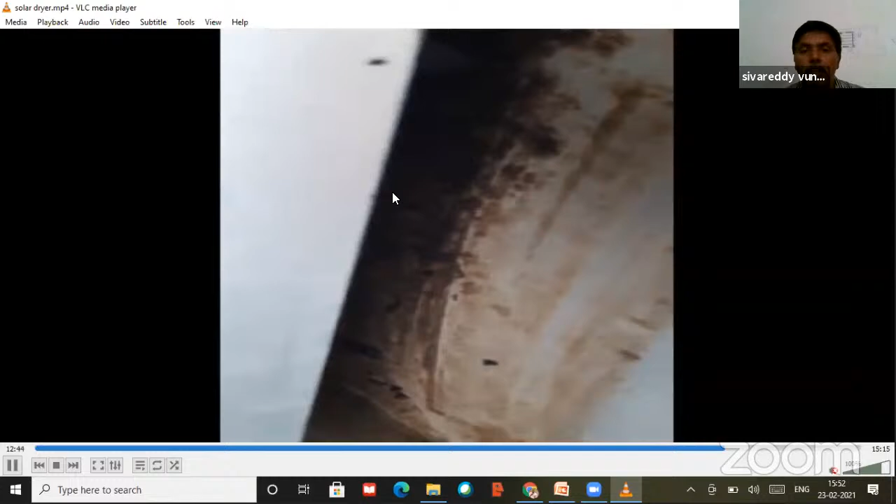This is the outlet. Because different materials, if after drying we are not cleaning the material, then later due to overheating, melting of the material is taking place. Because they are not cleaned after drying, whatever residue material is there, that residue material melting is taking place.

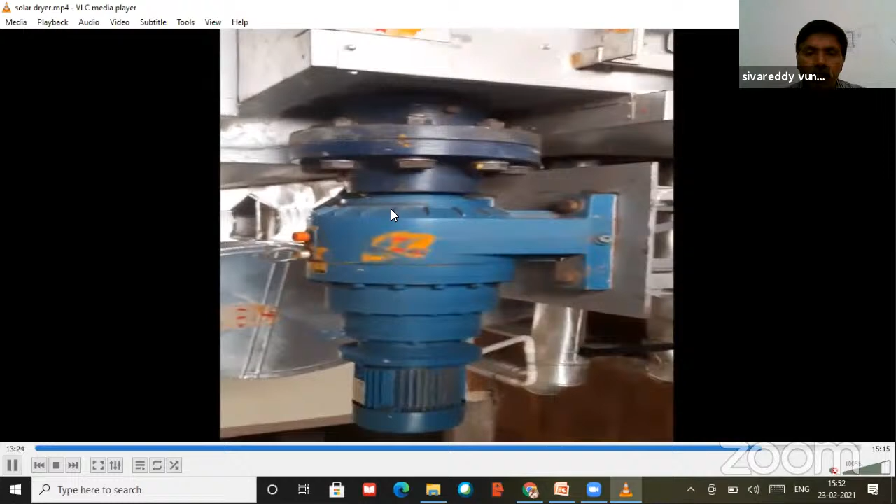Because movement of the conveyor belt is taking place, here we are doing the loading operation. Yes, you can see full movement of the conveyor belt.

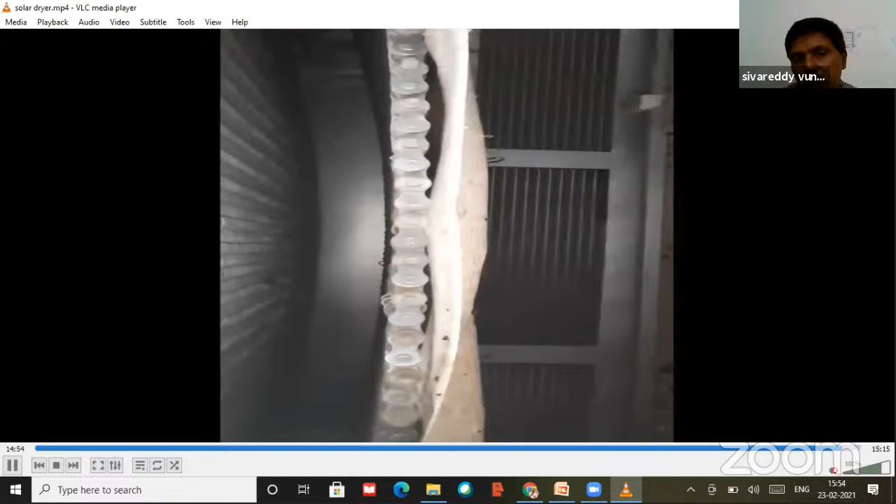But one major drawback: absorption of heat is taking place by the conveyor belt itself. This is the loss. If cabin type, batch type system we are using, the absorption of heat is very less compared to conveyor belt system. But for industry model demonstration purpose, we established this one. Compared to this conveyor belt system, batch type system will give more efficiency. I think this is the second lab.